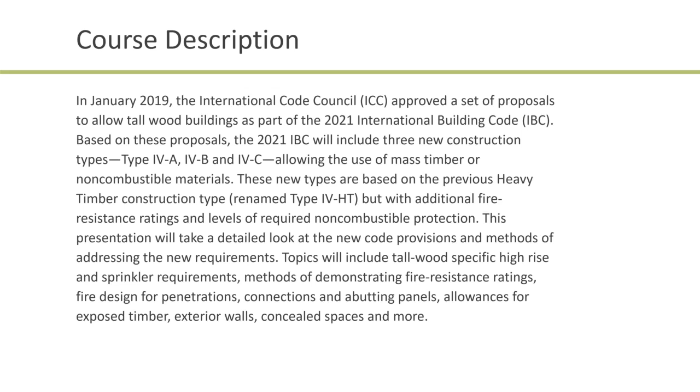So we're looking at the new construction types in the 2021 IBC. We've always had Type 4 construction, which is heavy timber. We have added Type 4A, 4B, and 4C, and you can see the differences - that's what we're going to spend a great deal of time on.

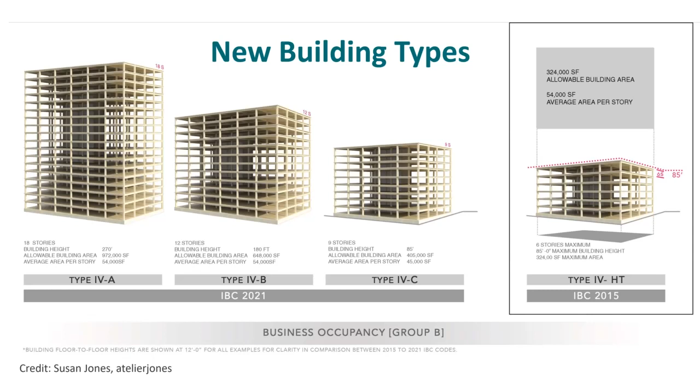Over on the right is our Type 4 heavy timber, which has been in the code for a long, long time. That still remains as Type 4 heavy timber, but you can see we're limited to 6 stories, 85 feet - a little bit smaller than the code provisions for the new buildings.

You can take a quick look at this slide - we won't spend a great deal of time, just know this is in the code. These are all unsprinklered values, but it'll give you a sense for the height, the number of stories, and the footage, which we saw in the previous slide. You can always refer to these tables in the code to access this information. Sprinklered is substantially different, which makes perfect sense.

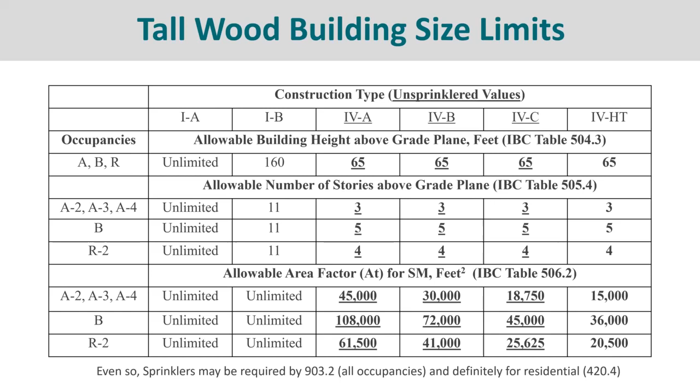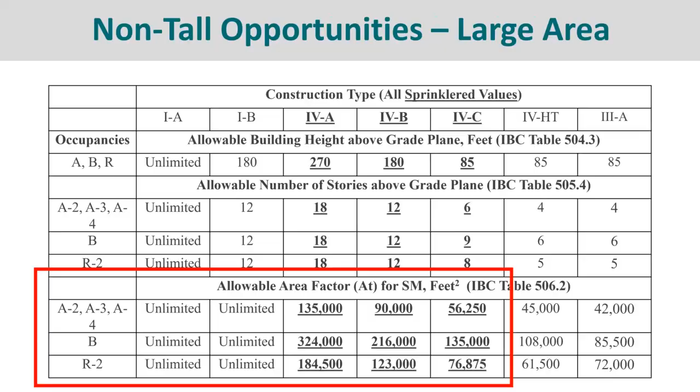As mentioned, in almost all cases sprinklers will be required. So first we're going to talk about Type 4A, which is the tallest of the new buildings we can do, up to 18 stories tall.

Again, we can see based on occupancies some of the differences, especially in the areas we're going to have. That will be a big driver of what we can do and how much area. Business occupancy, typically, we're always going to be able to get more square footage.

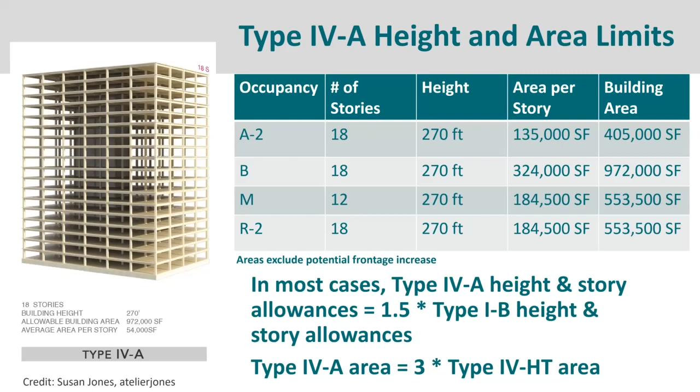So in order to achieve 18 stories, we need to protect the wood 100% with non-combustible protection, which is usually going to be drywall - probably the most simple, direct way to do it. And that's how we're looking at this today.

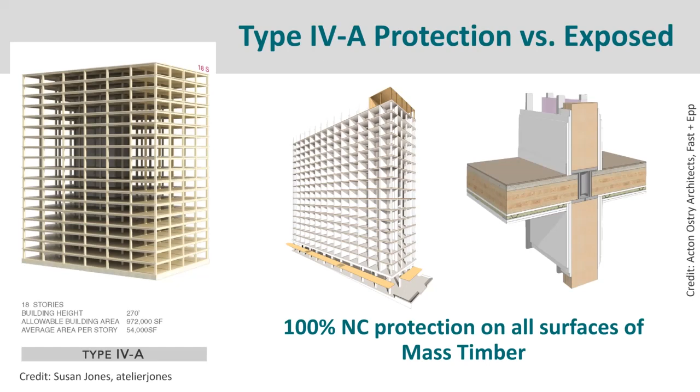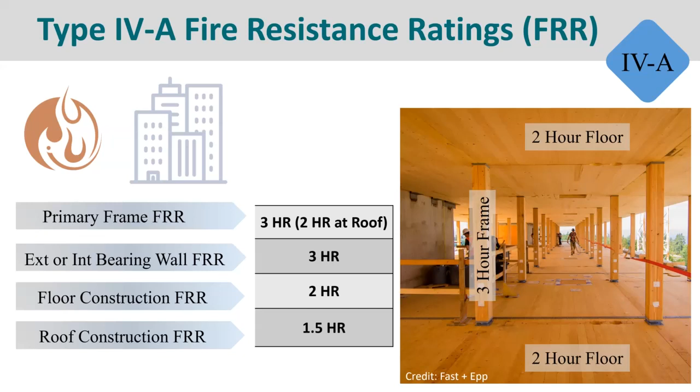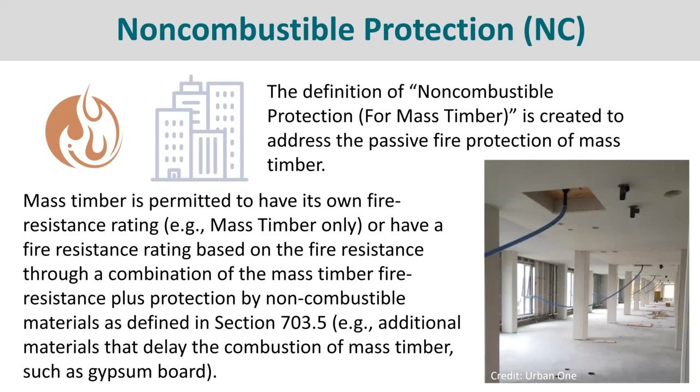So we're looking at passive fire protection. But mass timber also has its own fire resistance rating, like we've always used in type 4 heavy timber construction. Depending on the size of the members, we can use the char rating to obtain some time from the wood itself, and we delay additional combustion with the gypboard. So we can take the fire resistance of the unprotected element and add it to the non-combustible protection.

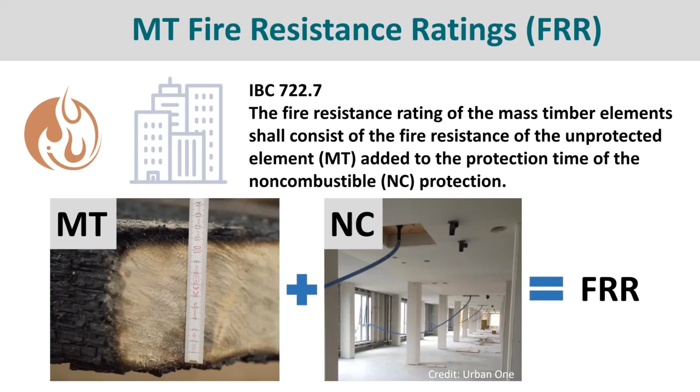Over on the left, you can see a wood member that was placed in a fire which charred, and charring is going to give us that protection. It allows the wood to remain cool under the char for a longer period of time, and we can calculate that very exactly, so we know how long that wood can survive in a fire based on the size of the member. So in some cases, we can simply use the non-combustible material or maybe just mass timber, depending on the building type.

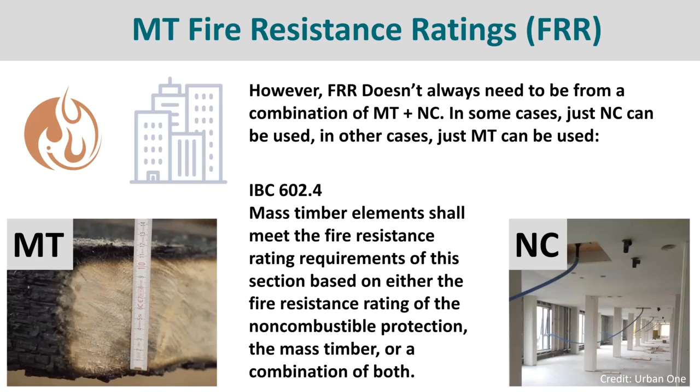Now, just like we've always had in type 4 heavy timber, we still need to meet minimum sizes based on where those wood elements are going, whether it be a column, a roof, or a floor. So this is what we're really familiar with in type 4 heavy timber construction.

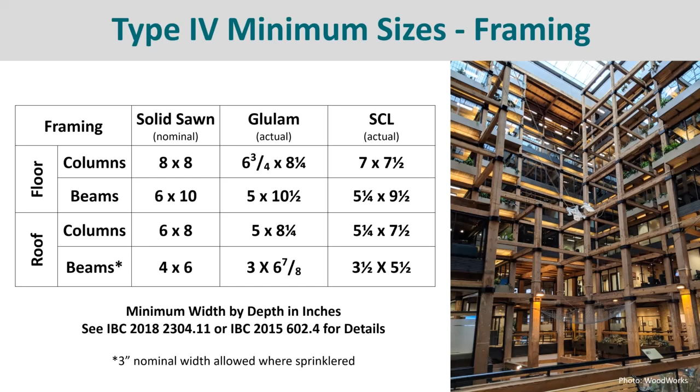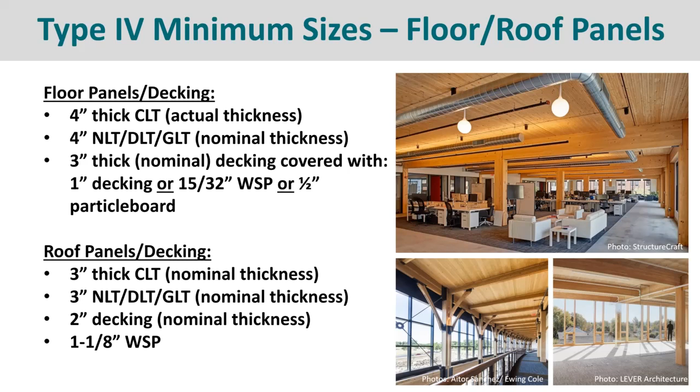And then we have similar things that we can look at for the roof. We're not quite as thick — we can get by with 3-inch thick or 2-inch decking. A lot of this has been taken right from the heavy timber that we've been used to using.

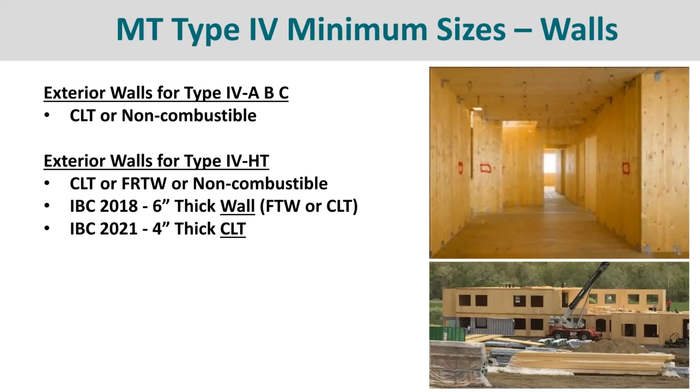Primary structural frame, here's some examples. 3 hours required, so we need at least 120 minutes. We could use 3 layers of 5/8 type X. If mass timber counts for an hour, we can get by with 2 hours of protection, basically.

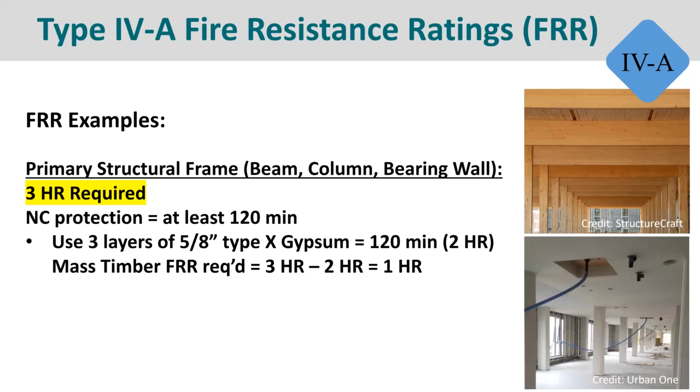Floor panels, we need 2 hours, so we need at least 80 minutes. Again, I'll just let you read through the different ways of arriving at this.

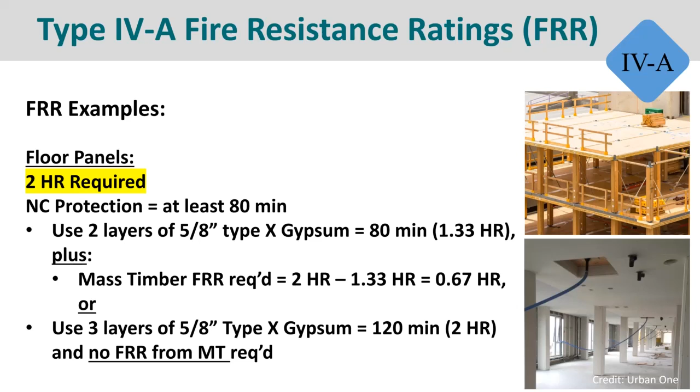I guess the bottom line in most of these buildings is we're going to see a lot of type 5/8 type X gypsum for sure. We can see that if we use 3 layers, we can get to 120 minutes, and we don't need to count fire protection from the mass timber.

Now in type 4A, we need floor surface, roof surface, and exterior wall protection. Here we can see the floor minimum 1 inch thick, in this case looks like a gypcrete type product. Minimum 2 layers of 5/8 type X gyp on the inside face. I'll let you again read down.

It's really well laid out as to how we can arrive at these types of assemblies. I should mention, this presentation is available on our website in its entirety in PDF format, so you can always refer back and find this information, which I think is nice because it's condensed a little bit and maybe easier than just perusing the code.

Here's an example of a 2-hour floor. We said we can get 40 minutes from the mass timber, and we use 2 layers of type X 5/8, or we simply use 3 layers of 5/8. It also shows a minimum 1 inch non-combustible floor covering.

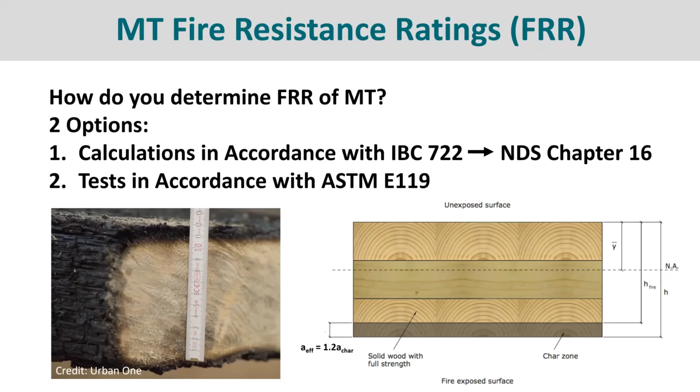So there's a few different ways of doing these calculations, like we mentioned before. For right now, the main point is to skip to the bottom, IBC 722, and we're looking and saying we can do this in accordance with Chapter 16. So when you're dealing with a building official, we refer to that and say we're calculating our fire resistance per Chapter 16 of the NDS, which is allowed in the code.

And there's a lot of information in there for different products. So this is where the architect is going to want to refer typically to the engineer for this type of information.

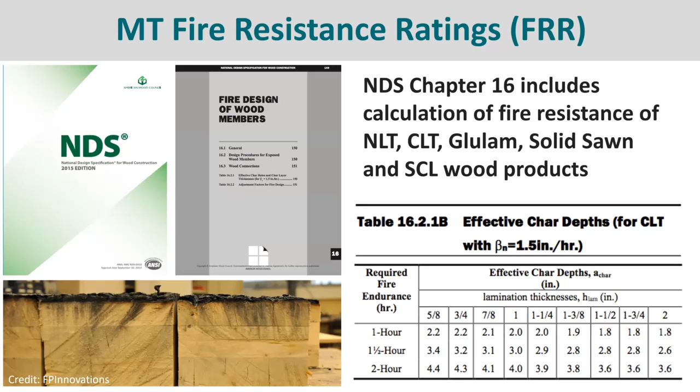The nominal char rate of 1.5 inches is recognized in the NDS, and then we can base that on calculations, and it's a very conservative calculation so that we have some leeway there.

So basically what happens if our beam lost, let's say, 1 inch around the perimeter of the beam, but the beam were oversized by 1 inch for the design load, we're still capable of carrying the design load. If we add 3 inches to it, we can basically get 2 hours of protection. 1.5 inches is going to give us 1 hour.

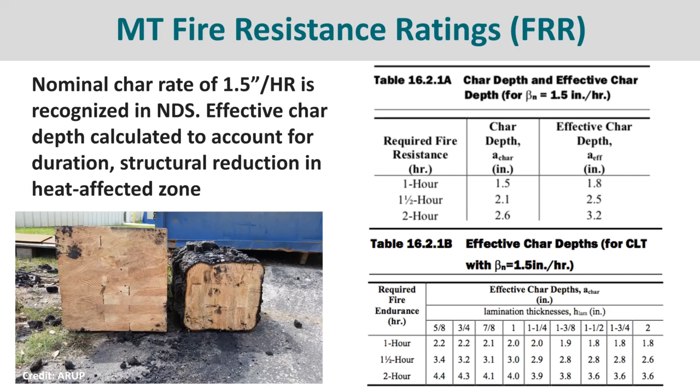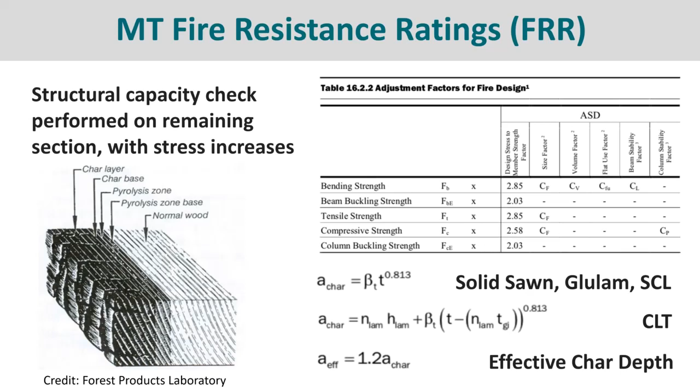Tested assemblies, different test reports by different agencies, anyone who's accredited to do this. And of course UL usually comes to mind because it's the most readily available, I guess, but there's a lot of other ones and they're all equally capable.

We have very good information on our website. This is one article that's on our website. Really, tons of information there. So I would advise anyone, when you have time, go to our website and take a look, or when you need something, but you may want to peruse it ahead of time and just get a sense for what's there.

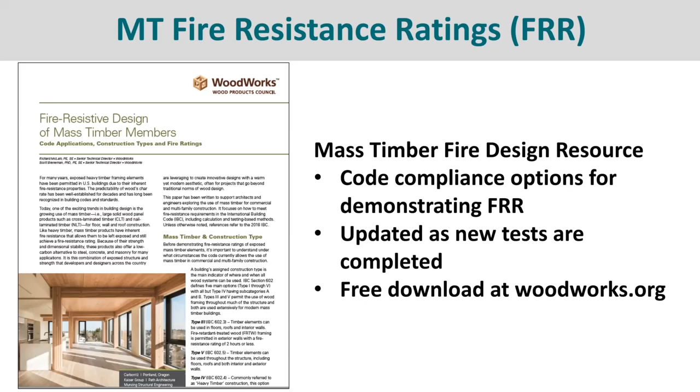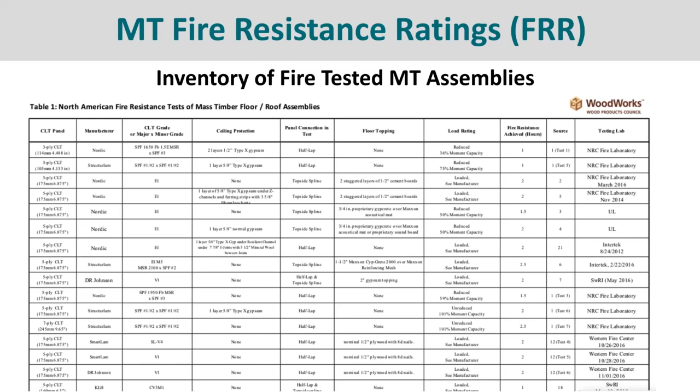Contact Anthony or myself, let us know if we can find something for you and help you. I mentioned this inventory of fire tested mass timber assemblies that is on our website, and this is going to be in constant flux because we're going to keep adding information to this as they're tested.

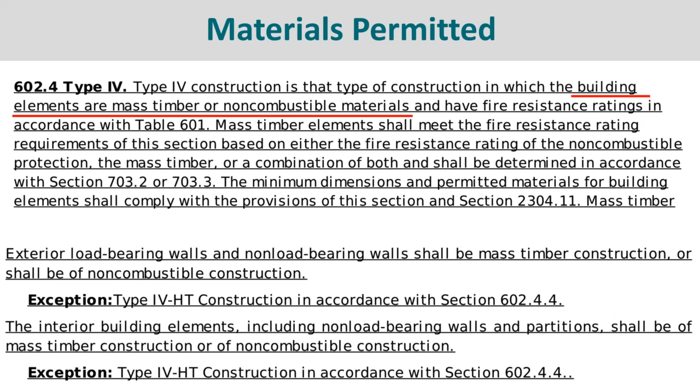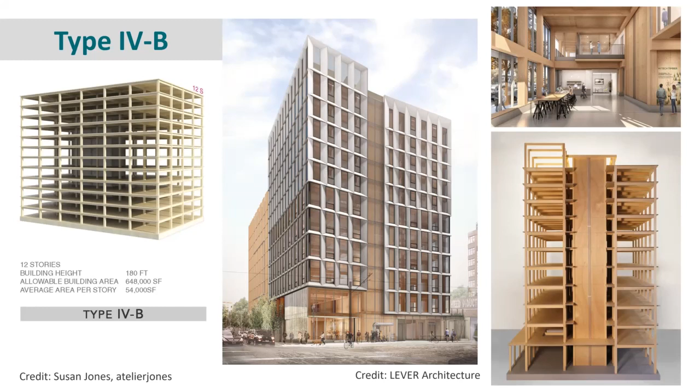We need non-combustible protection on all surfaces of mass timber except limited exposed areas. It's kind of a compromise. Now we're limiting it to 12 stories instead of 18, so we're getting a little bit more leeway here to expose some wood, is basically how we're looking at this.

And this can vary a little. You can calculate this, we'll go through a couple examples. So 20% of the ceiling or 40% of the wall can be exposed, but that has to be calculated. There's some caveats to that.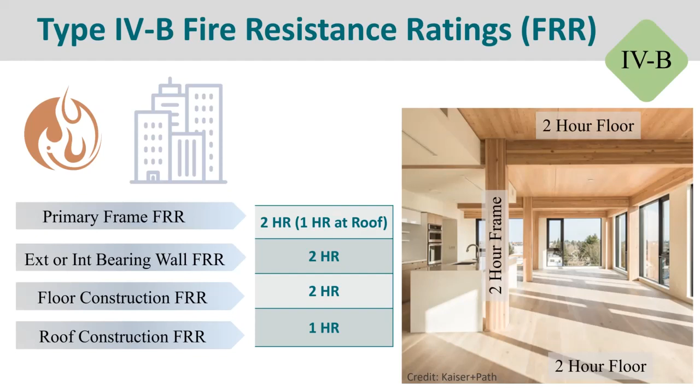And again, we can look at this table and say, how much non-combustible protection do I need? So minimum non-combustible protection based on where we're at and what we're doing in the building.

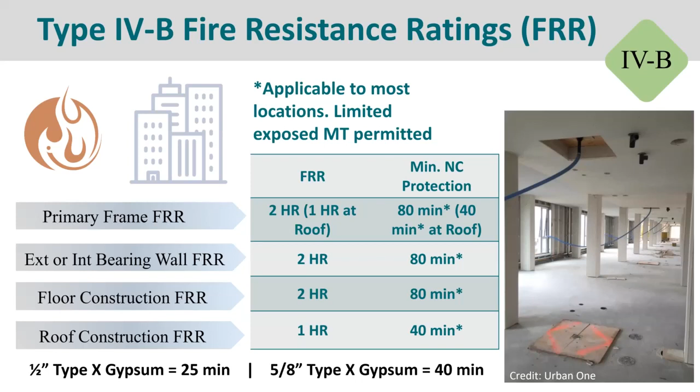Type 4B still requires floor surface protection, similar to what we did in 4A. And again, we can look at the roof and we can look at the exterior wall protection. So it's just going to be a little bit more lenient, a little bit less than we had in 4A.

So here, again, we can say, well, we can get 40 minutes fire resistant rating from the mass timber. We add 2 layers of 5/8 type gyp, or we simply use 3 layers of type 5/8 to achieve the 2-hour.

And again, the same thing with the beam situation. We can say, okay, we can get 40 minutes of mass timber and 2 layers of 5/8 type gyp will work.

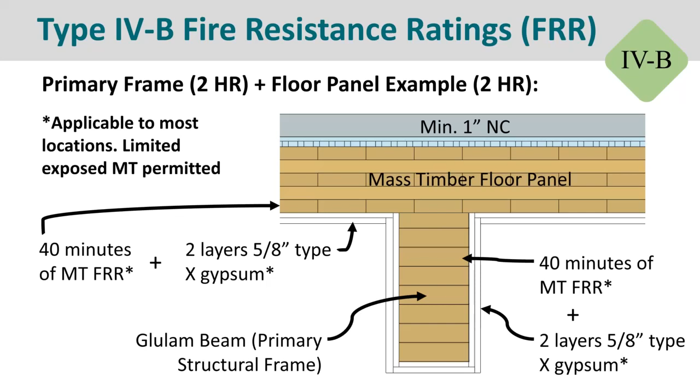So this one I think is a little bit simpler because everything is basically 2 hours. So limited exposed mass timber is allowed. So mass timber beams and columns, which are not an integral part of walls or ceilings. I'll let you read through the rest of this because, again, you're going to glance through that quicker than I can read it to you.

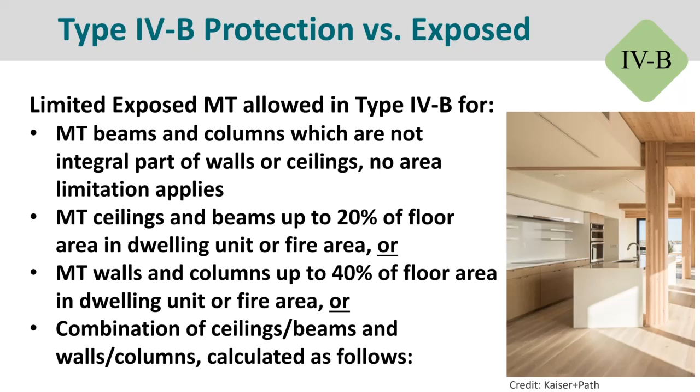And then just to make it a little trickier, we can do a combination of the ceilings, beams, walls, and columns. We'll just take a look at how we could do that.

I'll let you read through this. Just know that this formula is here to use.

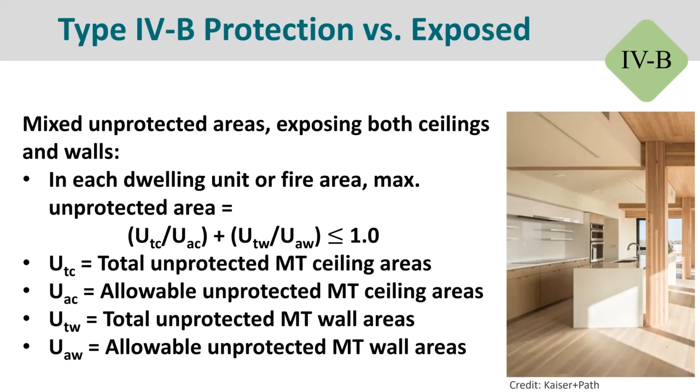A lot of this is going to depend on the aesthetics of what the architect is looking to do, and I think a lot of it's going to depend on the actual structure of this unit, what makes sense. So we have some leeway here to take and run with this in a way that we can really say what's going to be aesthetically the most pleasing, and how do we structurally accommodate this to help with that. I think we need to look at both.

So if we mix the mass timber walls and the ceilings, then we can come up with 120 feet of walls and 100 feet of mass timber ceiling.

Now, there are some requirements. Unprotected portions of mass timber walls and ceilings shall be not less than 15 feet from unprotected portions of other walls and ceilings, measured horizontally along the ceiling, and from other unprotected portions of walls measured horizontally along the floor. So we want to keep these elements separated.

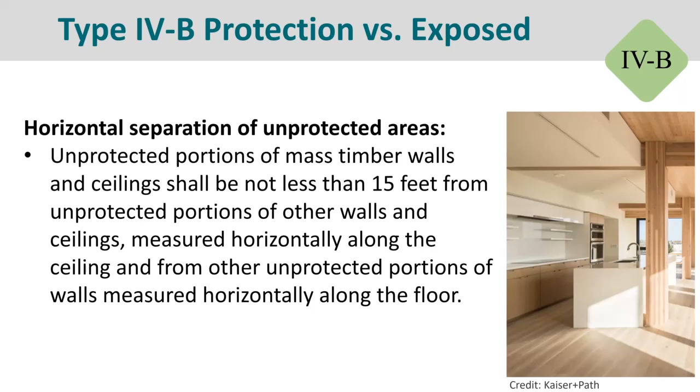I think really for this code, it's very practically done. There was a lot of logic used when they developed these codes.

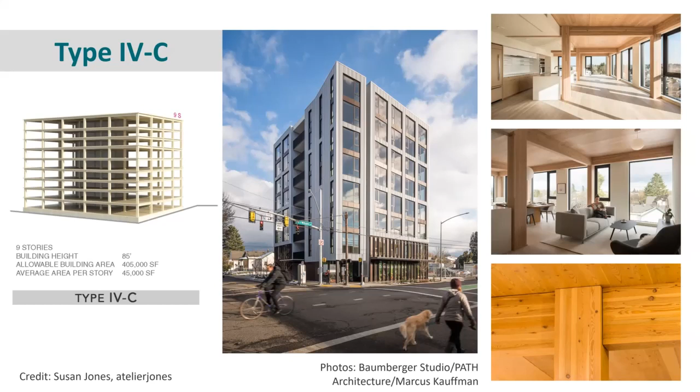So now we're looking at 4C, and now we're looking at 9 stories. So here we do have a little bit of a tough deal in a way. We can get to 9 stories in business, but we can only get to 85 feet. So that may be a little tricky. We might say, well, maybe 8 stories makes more sense, but we are allowed 9, but we're still limited to 85 feet.

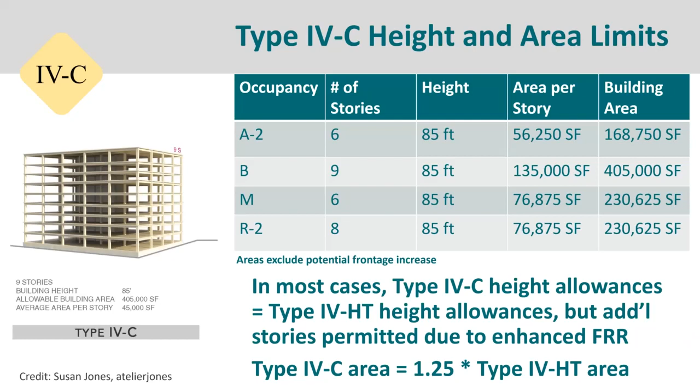Now, all mass timber surfaces may be exposed, with exceptions of shafts, concealed spaces, and the outside face of exterior walls. So again, this is more lenient than 4A and 4B because it's a smaller, less tall building.

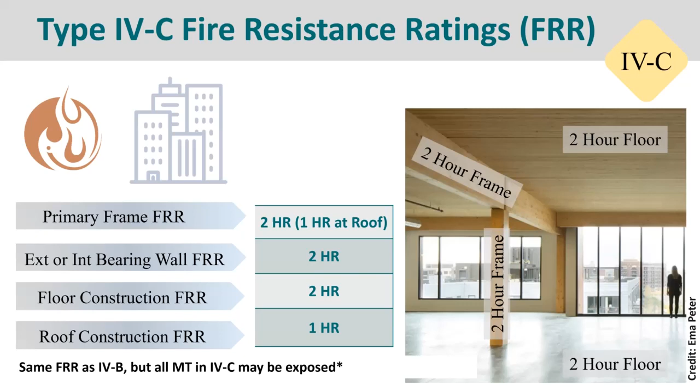Again, we're looking at 2 hours for all of these elements. Now, we don't need floor surface protection or roof surface protection. The exterior wall, we still need protection. So this is different than 4A and 4B.

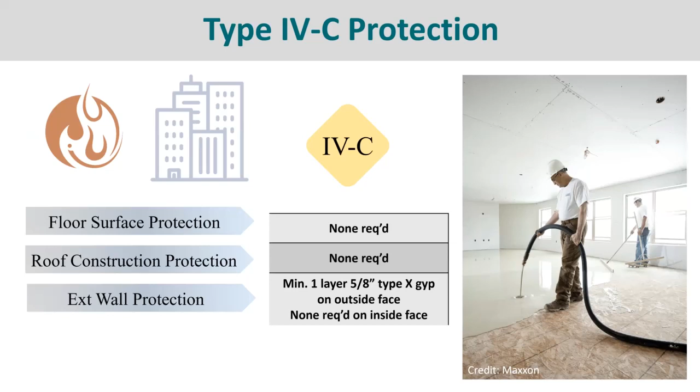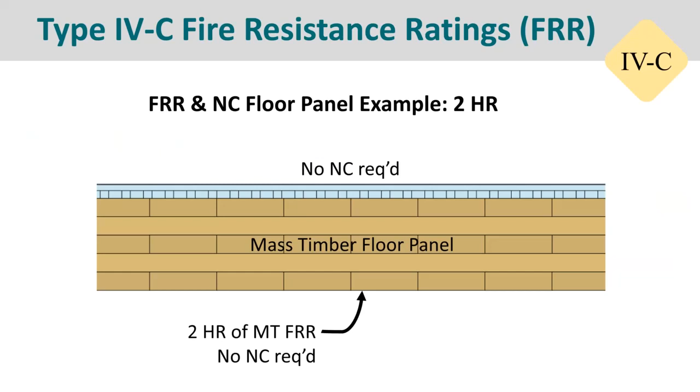So now we're not looking at any drywall, so we need to size the materials to achieve the 2 hours by having a large enough mass timber element, which is not really that difficult to do, but it's going to add some more wood. Same thing here, 2 hours of mass timber fire resistance.

No non-combustible materials required. So here we get a little better sense of some of the differences between what we're doing here with the different buildings and the hourly ratings. This is just what we went through, and this just shows it to you in table format.

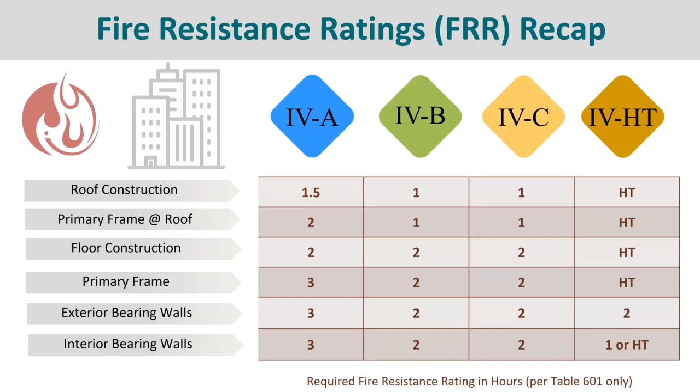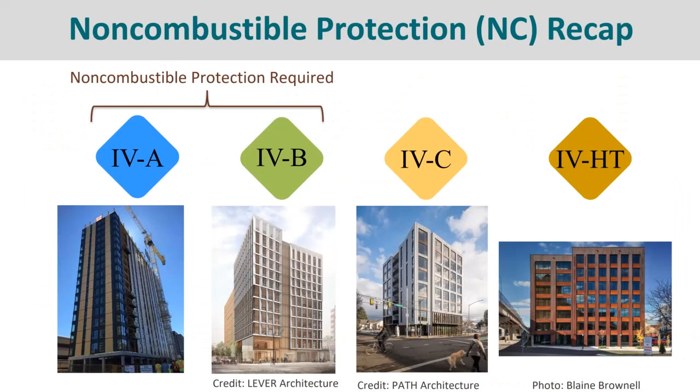So 4A and 4B, non-combustible protection required. In 4C and 4 heavy timber, we do not need non-combustible protection. And again, we can see the differences in the hourly ratings.

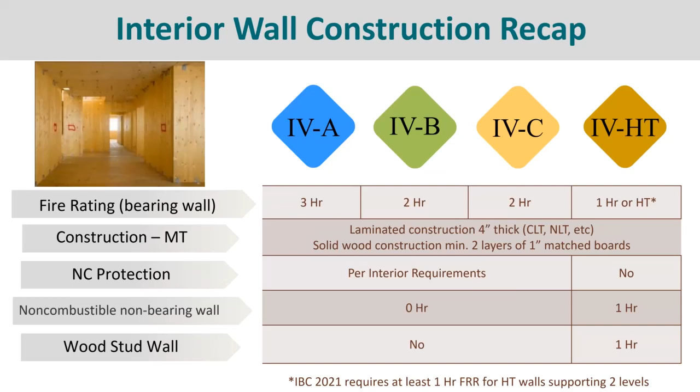Now, we do have a couple differences here between IBC 2021 and IBC 2018 for heavy timber. Look at the bottom row: we cannot use light frame fire retardant treated wood in A, B, and C. But we can do that in 2021 IBC.

So previously in heavy timber buildings, just heavy timber, we were not allowed to have concealed spaces. But now in these newer buildings, we are allowed to do that.

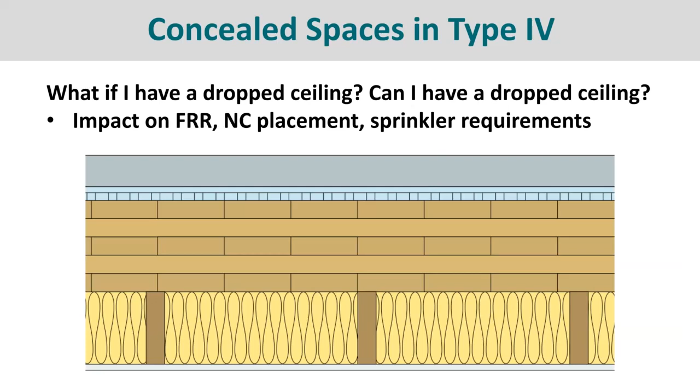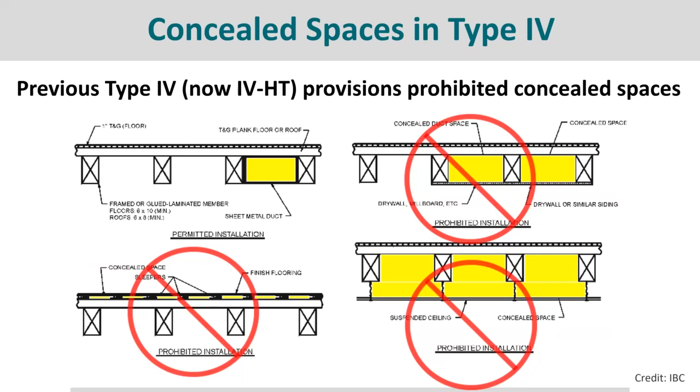So here's things we couldn't do in heavy timber. And I think that made it difficult in a lot of cases to do an actual type 4 heavy timber building.

Now, per 2021, we can do some concealed spaces. And again, I'll let you read this slide. But this is something you're obviously going to want to revisit.

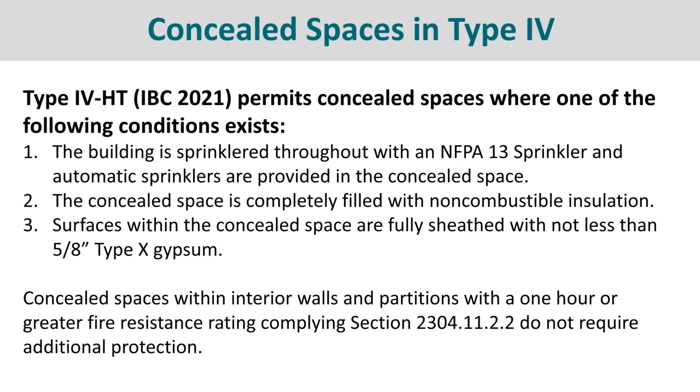We also have 2 engineers assigned to mass timber alone. One of our engineers handles current mass timber buildings 6 stories and less, and our other engineer handles these types of tall wood buildings that we're talking about today. They spend a lot of time doing it, and they're really experts.

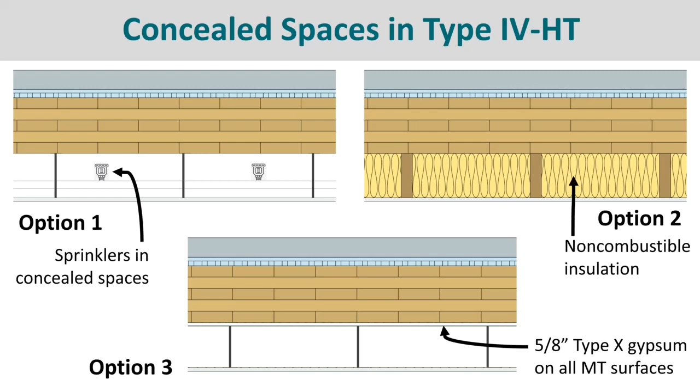So we can put sprinklers, we can put non-combustible insulation, or we can put type X gypsum on the mass timber surfaces. I think this is really a huge deal to make it much easier to do mass timber buildings, because concealed space really, for lack of a better word, threw a monkey wrench into some of those buildings.

And again, we can see the requirements where we can do this in heavy timber. I'll just let you take a look at how some of this is accomplished. Pretty straightforward, really.

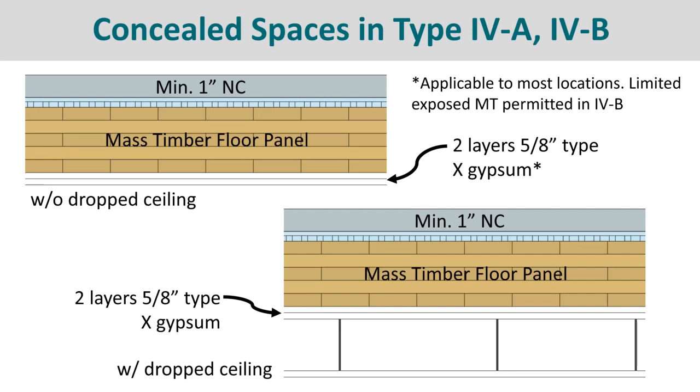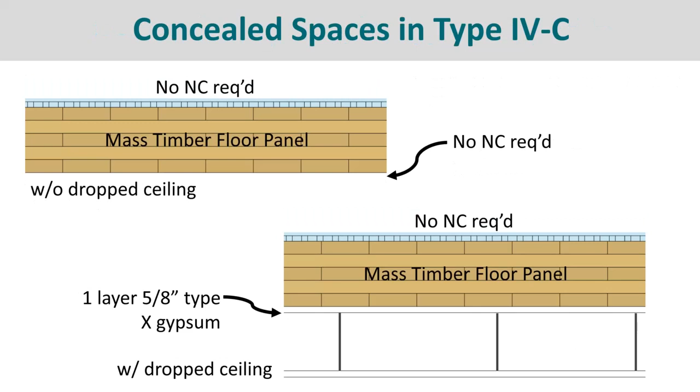So shaft enclosures can be mass timber, and this can work very well. This is a very, very efficient way of building these shafts using especially products like CLT.

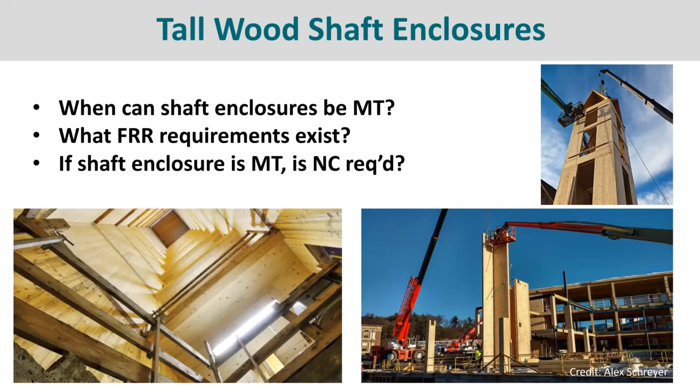So again, we can look at the differences between these buildings. What can we do? But only up to 12 stories or 180 feet in the case of the type 4. I'm going to let you read through this.

We get above 12 stories, the shafts are non-combustible. And we can see the difference between the protection of 4B and 4C.

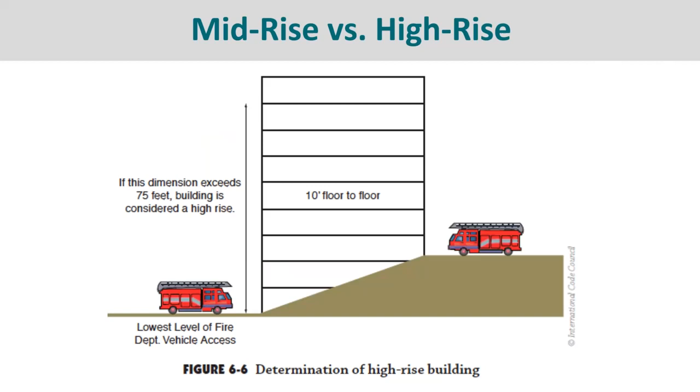Tall wood can equal high rise. So typically, when we want to determine if we're a high rise building, this is the measurement - that's 75 feet from the lowest level of fire department access to the top of the highest floor. Anything less than 75 feet is not considered high rise.

So sprinklers in high rises, we're looking at 2 water mains if building height exceeds 420 feet, or we're using type 4A and 4B that exceed 120 feet. Again, we're being very conservative. I think the code did a really good job of saying we really want to take a conservative approach.

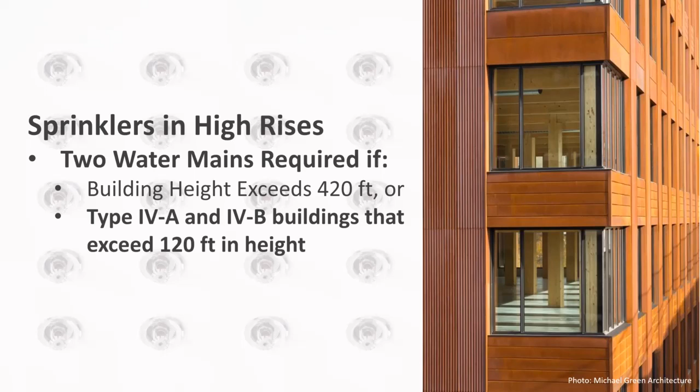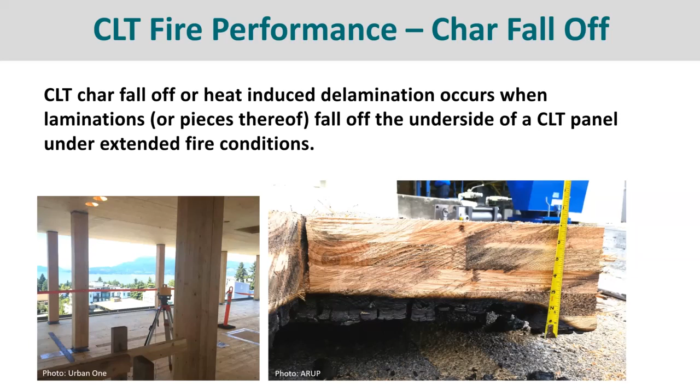CLT char fall off. Now, because there's glue lines, you can have fall off, and that has been tested and calculated. So there's calculations for CLT when we're looking at char that take that into account - that's really the best way to summarize that.

And you can have fire regrowth. Once a piece falls off and it's still exposed to the flame, that next layer is going to start to char. And that's why they did testing on this different than you would for, let's say, a 12 by 12 timber.

So this is only considered in tall buildings, not applicable in mid-rise mass timber or any building under types 2, 3, 4 heavy timber or 5.

And the PRG 320 2018 requires these higher temperature resistant adhesives, and as far as I know, every manufacturer now does adhere to that. And then under 2021, all CLT is required, but all manufacturers should be currently doing that.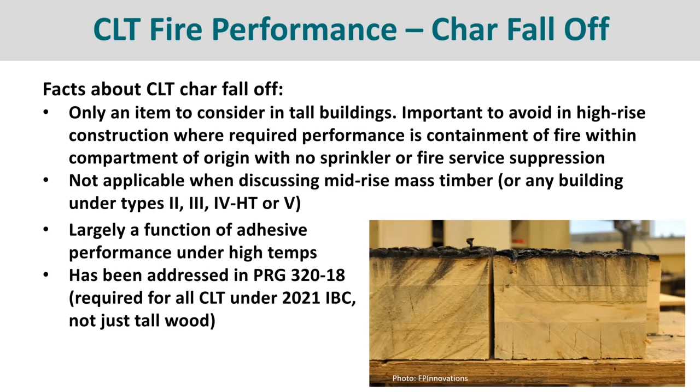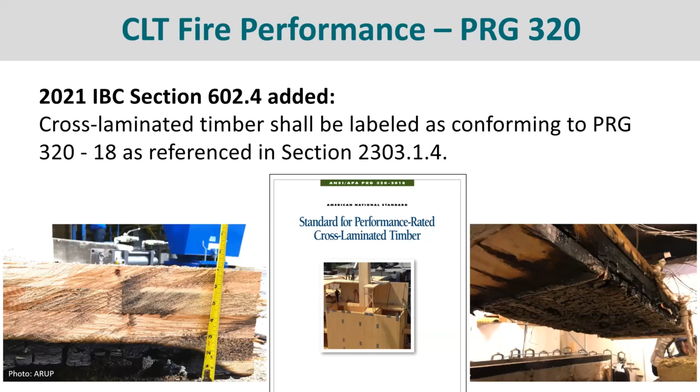So there are earlier versions of PRG 320. So we want to make sure that we're using PRG 320 2018 and it's referenced in the code. This kind of reads through what I mentioned to you a little bit earlier. Just always remember PRG 320 2018, and of course, it's in the 2021 code. That's going to be required.

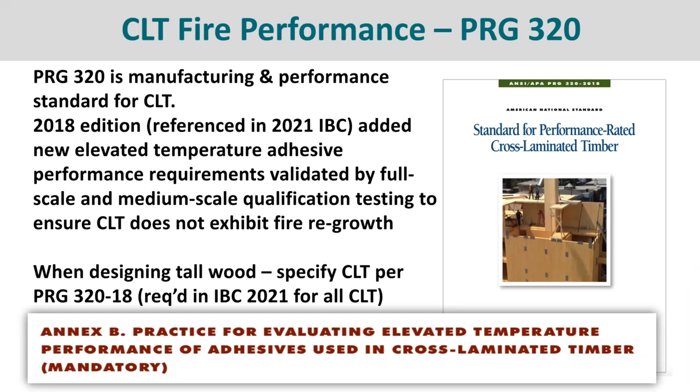Connections. We're going to skip through here, and we'll go through this pretty quickly to allow enough time for questions. So you can see there's some pretty fancy connections.

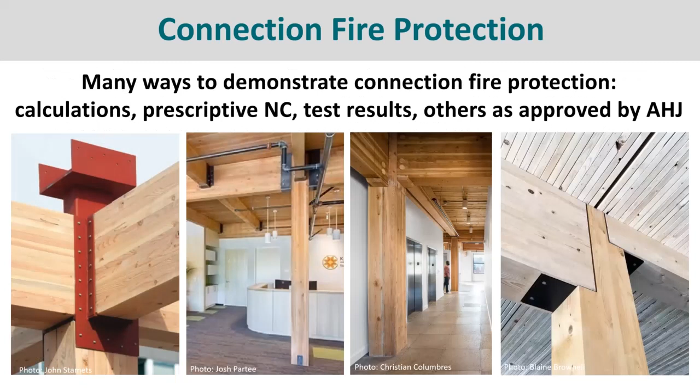So building elements are required to be fire resistant rated. The connections also - that's critical. So there's a lot of ongoing testing going on, and then we have to look at ways to protect the connections. Again, I'm going to go quickly through this in the interest of time.

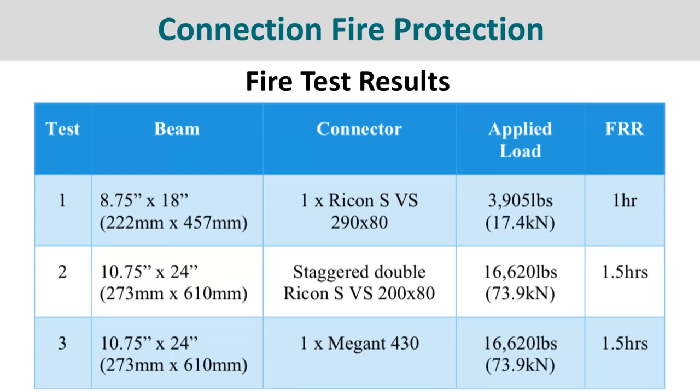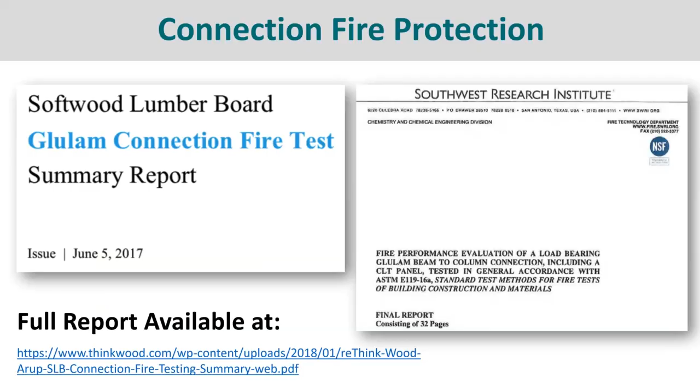A lot of testing has been done. These are some fire test results that have been done for various manufacturers. There's probably more than this now, and we're going to see a lot more based on utilizing the 2021 code. Manufacturers are going to take the time and spend the money to do this so that they can market these connections and everybody can know that they are meeting 1.5, 2 hour type fire resistance. The Softwood Lumber Board, who's our major funder, has done a lot of funding for research. So there's a lot of tests that have been done.

Penetrations, we're going to kind of skip over this a little bit. We know that we really need to look at penetrations and fire stopping.

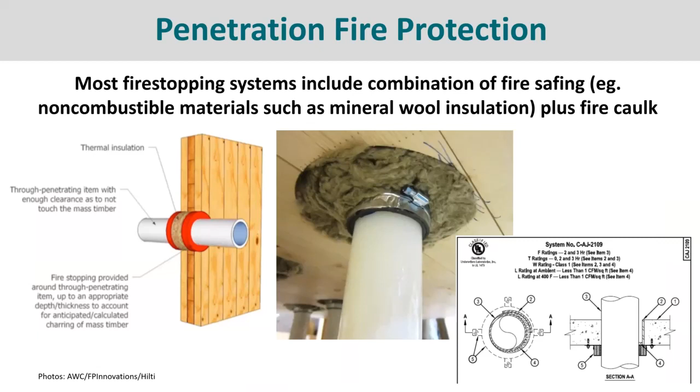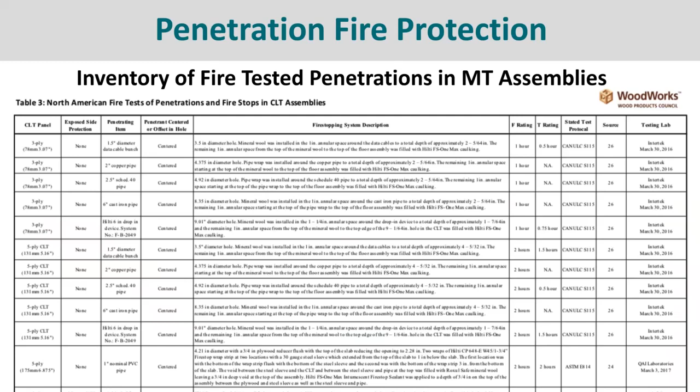We're not going to go too deeply into this. This is something we can help you with if we need to get into this type of detail. We work with people like Hilti and STI and others, so we can always refer you to that regarding fire tested penetrations in mass timber assemblies. There's an inventory of that on our website. Sometimes panels are tested with sealants, and if so, the sealants are required. I'm not going to spend too much time on that.

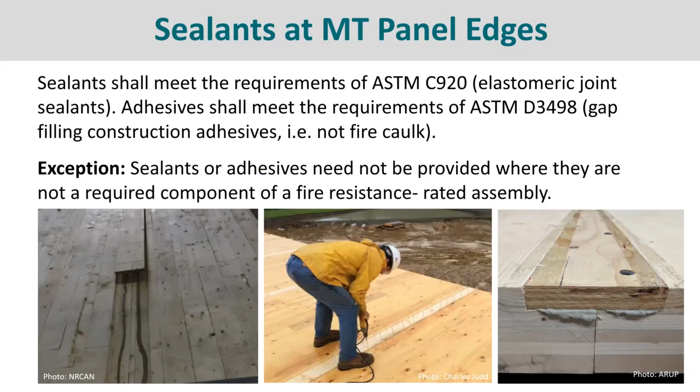There's different sections of the code that we need to look at for these types of protection of mass timber for incidental use separation. Bear this in mind, but we're not going to spend time on this.

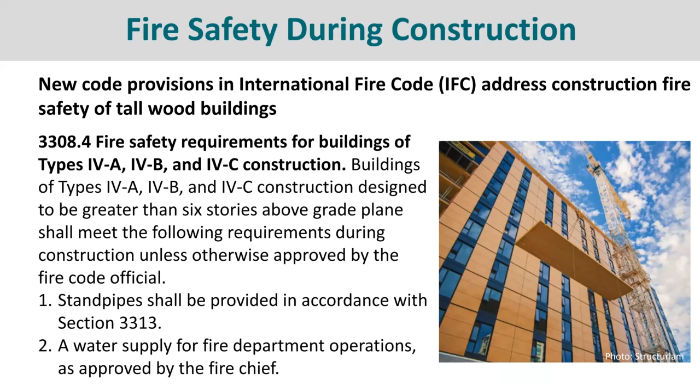Fire safety, there's code provisions for fire safety. It's really, really critical that we adhere to this. Standpipe requirements.

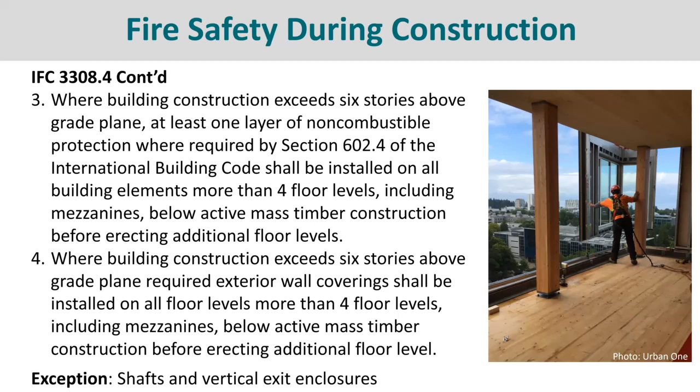So the key here is, as we're building these buildings, we're only going to go up a few floors and we're going to make sure we're protected. You can see if we're above 6 stories, at least one layer of non-combustible protection shall be installed in all building elements more than 4 floor levels. So as we go up, we need to install protection. We can't just build a 10-story mass timber building and come back and install the protection later. That's basically what this is getting at. This pictorial will really explain it a little better, but it makes perfect sense.

I think just being cautious and saying, well, we're going to protect this and we don't want all of this wood exposed. So that's basically how we're going to deal with it. Every 4 floors, we're going to come back and add protection.

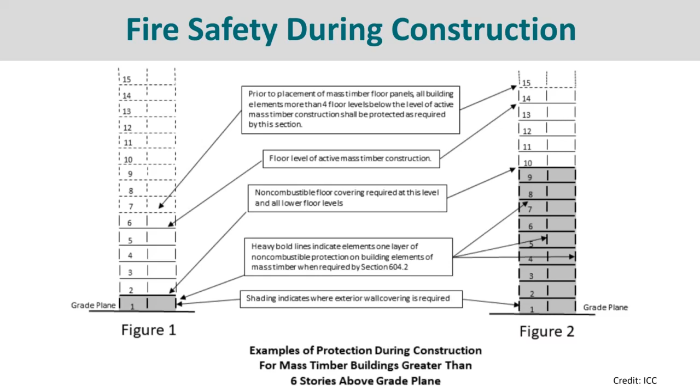So with that, I think we've allowed enough time here for some questions.